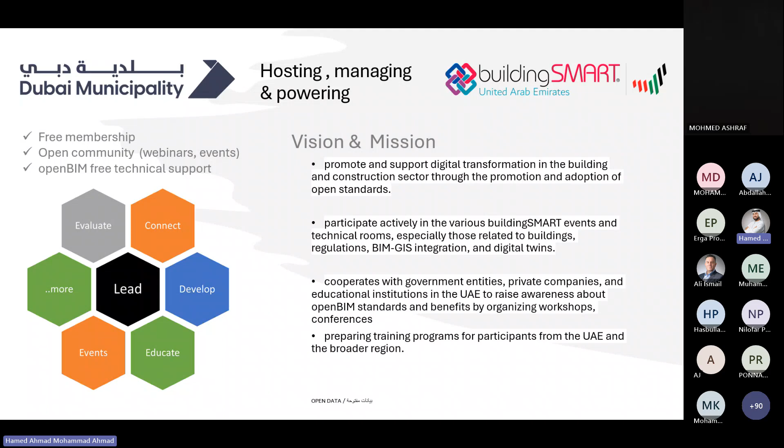So, our mission is to unlock productivity and sustainability by championing open data and promoting open standards in the building sector. We aim to position the UAE as the global leader in digital transformation by integrating innovative technologies and fostering partnerships. The buildingSMART UAE chapter is proud to host and manage initiatives that foster collaboration among government entities, private organizations, educational institutions, and even individuals.

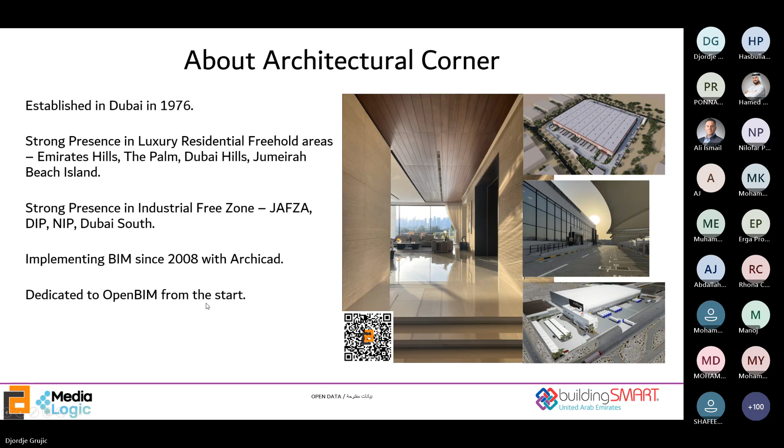What I wanted to speak to you about today is how we use openBIM in daily projects. We use BIM in all the projects that we do, regardless of the client's requirements or the lack of them. If the client has a BIM execution plan or specific requirements, we of course follow them without a problem.

Therefore, we have decided to show you two examples, case study 1 and case study 2. Case study 1 is our standard industrial project workflow and the way that we normally do it, with the emphasis on the openBIM collaboration with the steel supplier that is providing his model in IFC file format. We normally do everything else in-house in one federated integrated model because that is the best way to avoid clashes, and instead of doing clash detection after the models are built, we try and strive to do clash avoidance during the design stage.

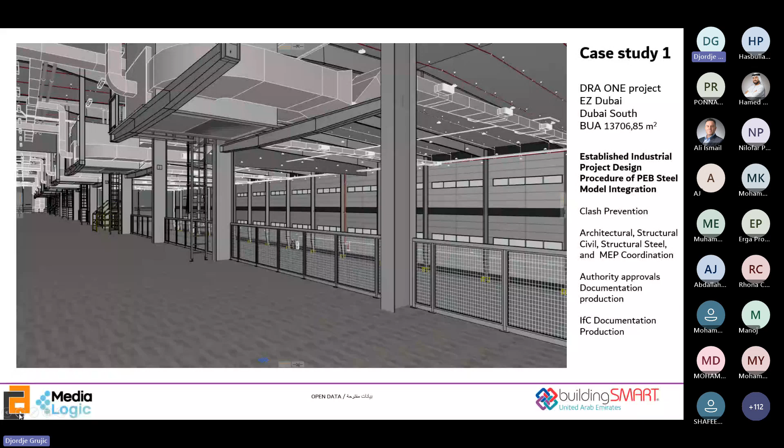If you have noticed, the steel design here is pretty straightforward. It is just describing the geometry, let's call it level of detail 200 or maybe a bit higher, let's say around 300. But when it comes to the issued for construction stage, the steel specialist comes in and they provide their IFC model that in this case was generated in Tekla. We then coordinate and integrate that model, but before we do that, we check their model and reduce the complexity of the model. Since in one of the cases for a larger project, only nuts and bolts were having around 8.5 million polygons, and the model was extremely heavy to manage.

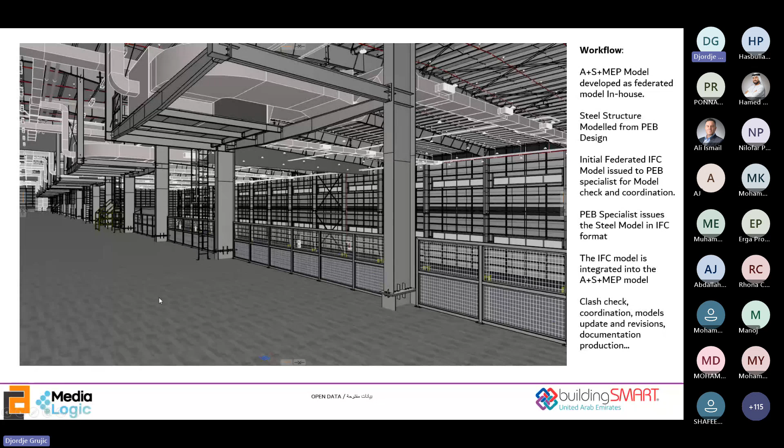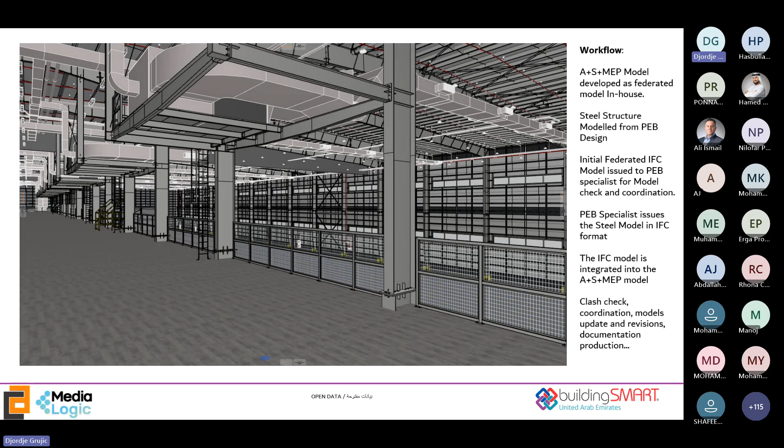As you are all aware, having a larger project, this one is not so big, can put an extreme strain on your computers and on your software. So at the issued for construction stage, after integrating the steel model from the supplier, we have done the MEP coordination. We have produced the issued for construction documentation for the site, and we have followed the site work by updating the models in order to, in the end, generate the as-built documentation.

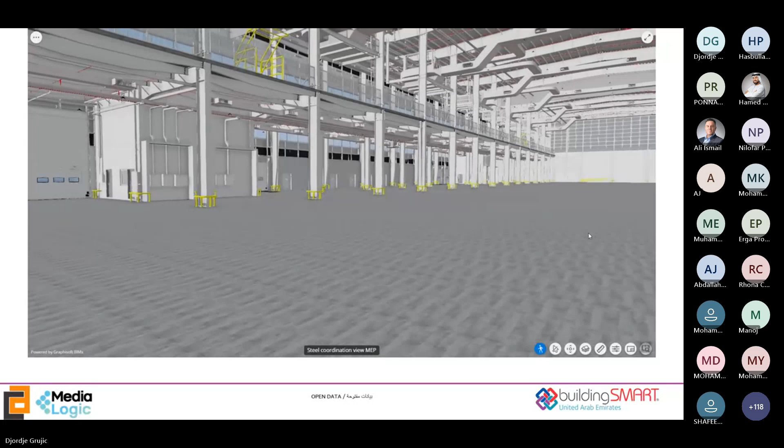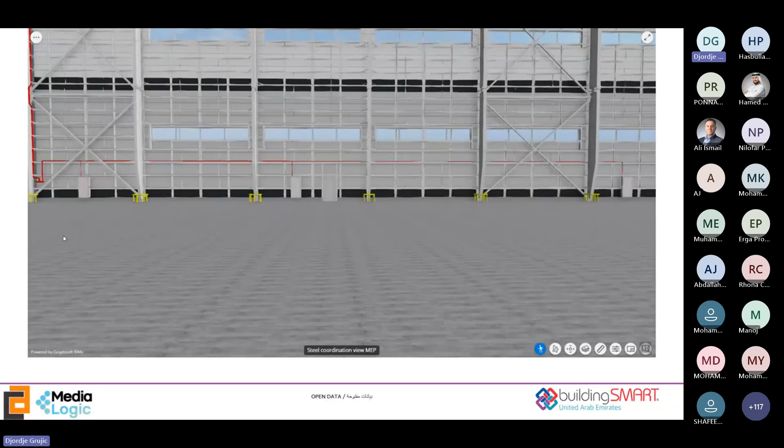This is a small movie of a walk around, if it works, a walk around through the model. As you can see, it is more or less. I have to say that the site team and the client appreciated having an opportunity to have BIMx hypermodels shared, and they have used them extensively for the design review by the client, and the site team used it extensively to clarify any small details or answer any questions that maybe were not covered in the standard documentation.

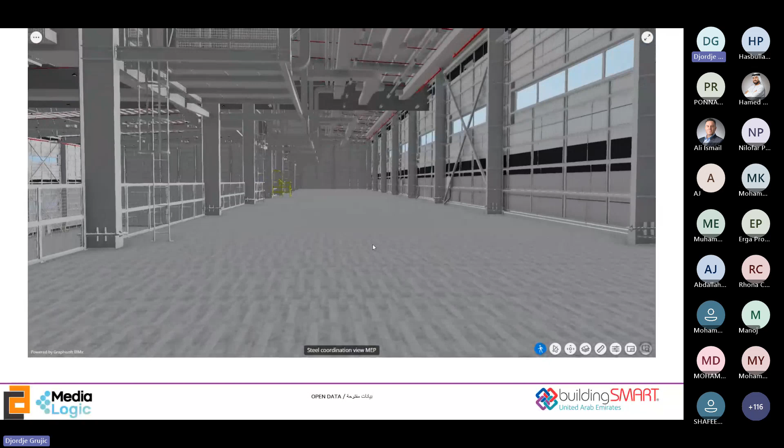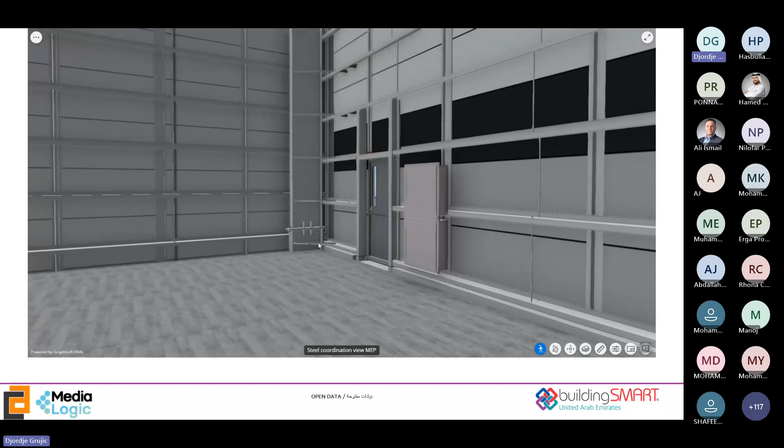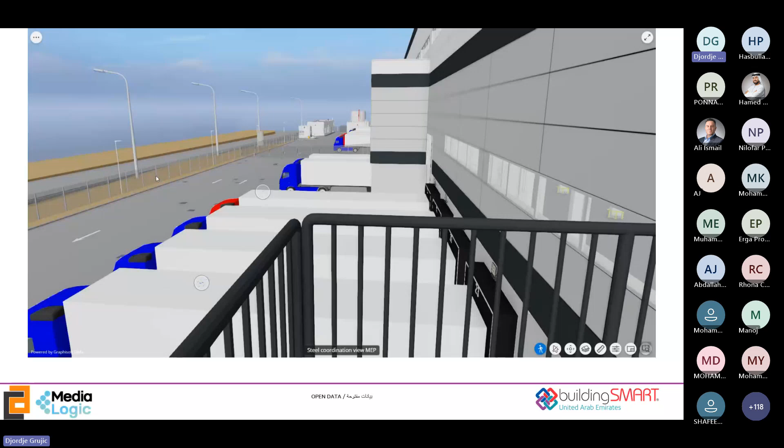So very quickly, instead of calling anybody from the design team, they just opened the model, checked it, made a snapshot on the usual WhatsApp group that of course exists for every project in Dubai that I'm aware of, or some other mode of communication that is more recordable and more professional maybe. And they were able to handle the clashes and the problems, if there were any, or answer any questions that they might have had on site, using just the BIM model and integrating BCF compliance and BCF questions and notifications that can be automatically sent and that show up in the model itself.

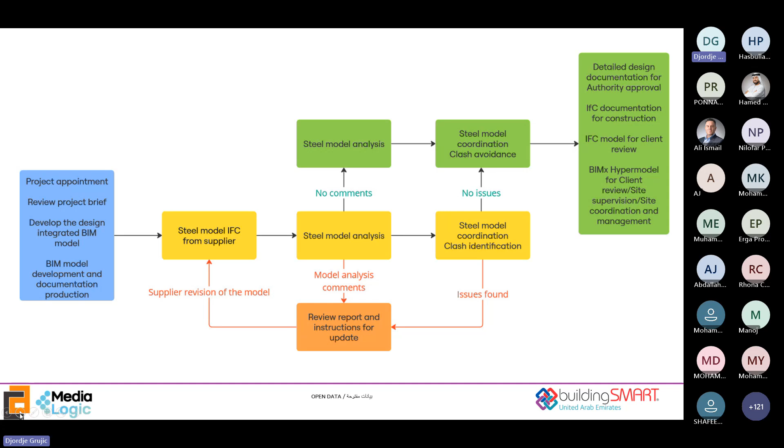And these are the lessons that we have learned. We have been doing this for quite some time, but on every project you learn something new because software changes, people change, design changes, clients' requirements change. A lot of things can change, and a lot of things can be different. For example, if you are in EZDubai in Dubai South, I have seen some colleagues in the audience that are very well acquainted with the area, you will see that all those buildings look more or less alike because there is a development control regulation specification from the client, but they are quite different. Maybe only the colors on the elevations and the application of them are similar. So every project has its own specifics, its own story. Maybe the scenario is rather similar, but the story is always different.

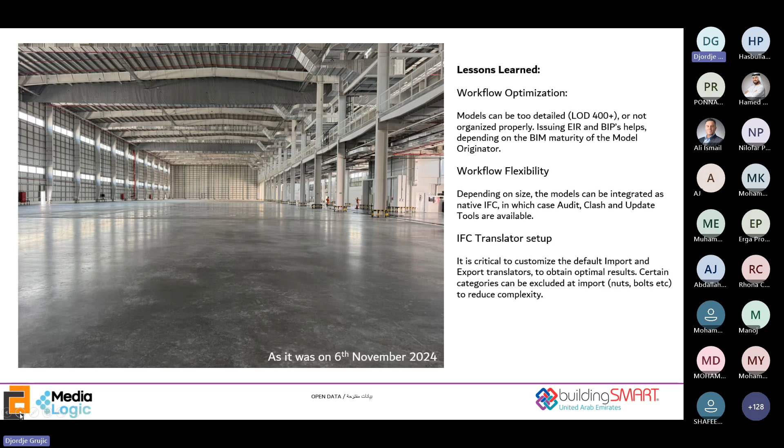Another project is slightly larger, about 3 times the previous, 40,000 square meters built-up area approximately. It is developed. It is now in approval process. It is developed by the Radius Group in DIP.

The story of this project is a bit different than the normal way that you normally work, because the client has very highly developed BIM capabilities and very specific requirements, with a very well set up common data environment and procedures for the running of the project.

So what happened is from the beginning, from the initial tendering stage, the client has provided concept design in IFC format that was the base for the development. What we had to do is to check those models and see how they work with the local regulations, with the specifics in the local requirements, with the authorities, and in short, to do a proof of concept and to use them as a reference for further development.

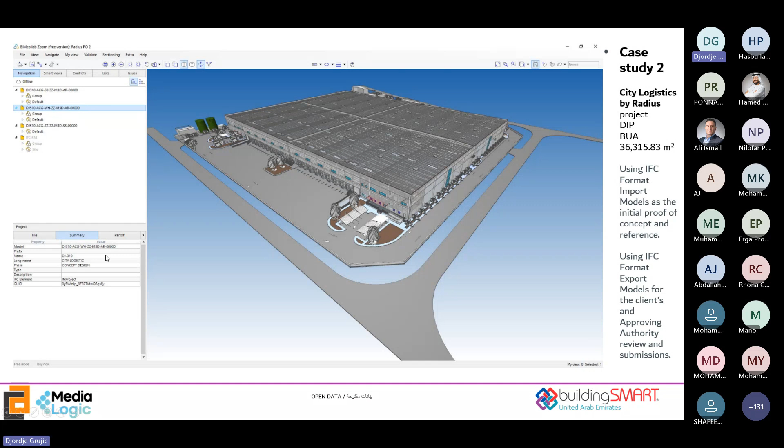After that, we have imported those IFC models and started reviewing and revising to the client's requirements, to the local regulation. There have been some changes in the structure systems. Some items were removed, some items were added. Normal design process. And we have been working on that project in the meantime.

The developed model, of course, we had to rebuild practically from scratch, using the original models as the reference. Parts of the original models are still living with us, although converted for the ease of use.

But again, the openBIM procedure, using exchange formats that are easily readable by multiple softwares, is the base of the success of transferring the client's idea and following the client's requirements to produce a design that the client is happy with, and produce a model or multiple models, whatever is required for the generation of the documents for the approvals and for the Dubai Municipality BIM submission approval also.

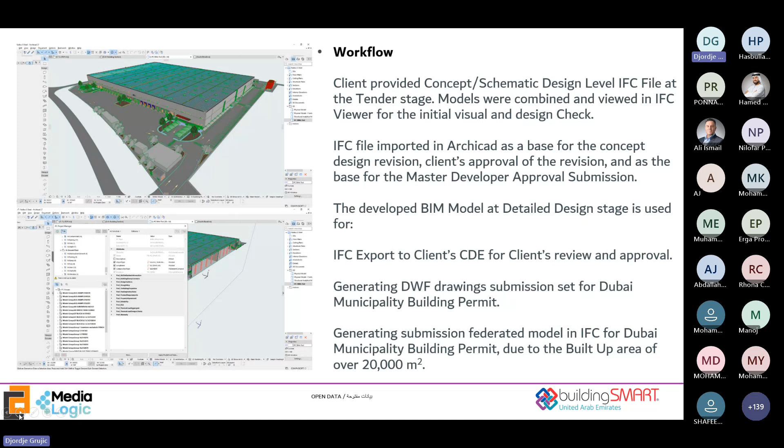If you notice here on the left on the top, there are 3 models, the 3 original IFC models, and we have combined our IFC model from ArchiCAD, from our updated concepts, preliminary design, so that we could run checks whether the models are aligning, whether all the required parameters and all the required elements exist in the models, and in short, whether everything is okay or not.

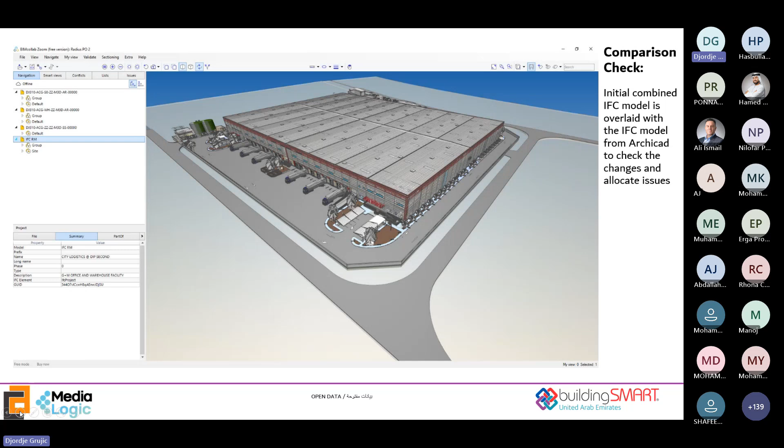In this, we had extensive support from the client, because they are used to certain software packages that they were normally using, but we have managed to overcome all the software compatibility, or the lack thereof, issues, and we are proceeding successfully.

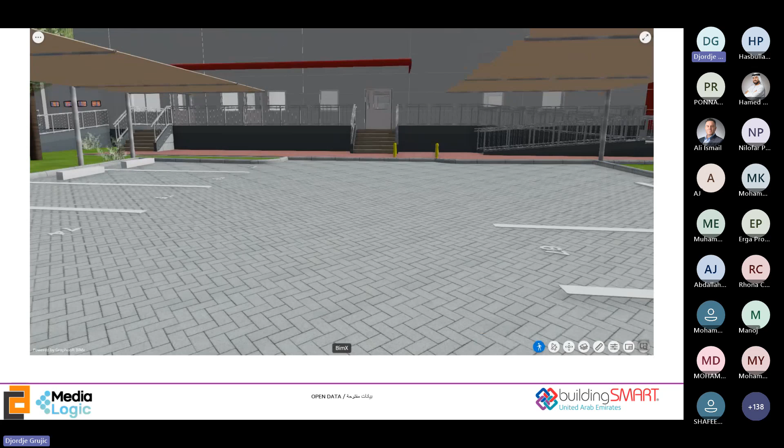Just a small movie to illustrate the model as it was about a month ago, if I'm not wrong. Of course, some things have been sorted out. For example, those bollards were in the wrong place. That's a minor detail.

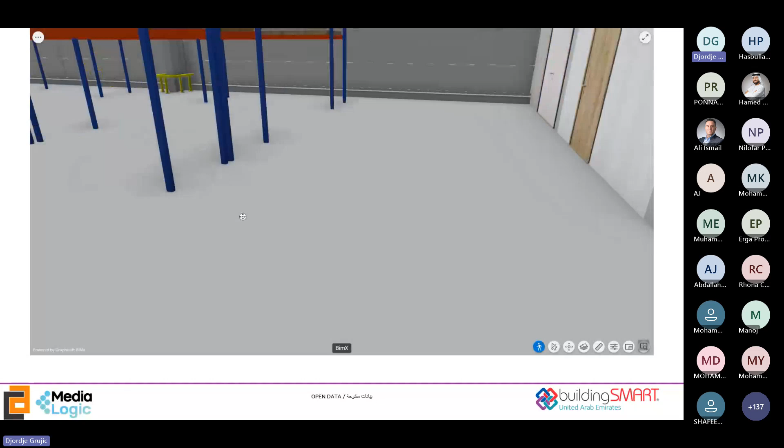What is the point of this exercise, or what did we want to show you here? The idea that you can start from one thing and develop it to be the other thing. Start from the IFC that was generated from Revit, or start from the Revit model, coordinate it with ArchiCAD, import it, review it, compare it, run the clash detection, run the specification checks, run the quantity checks.

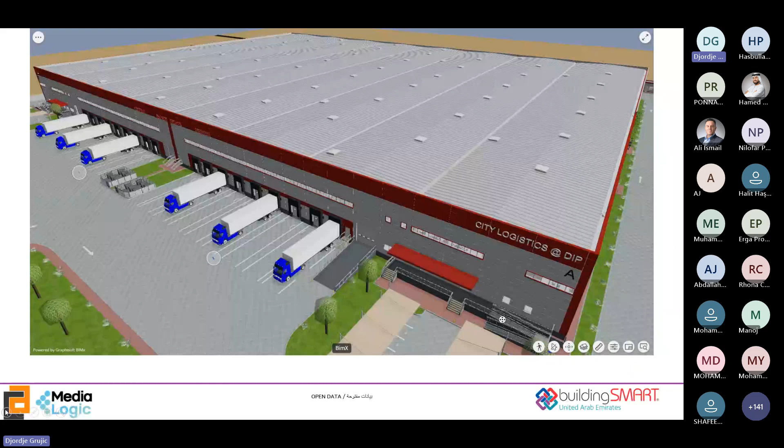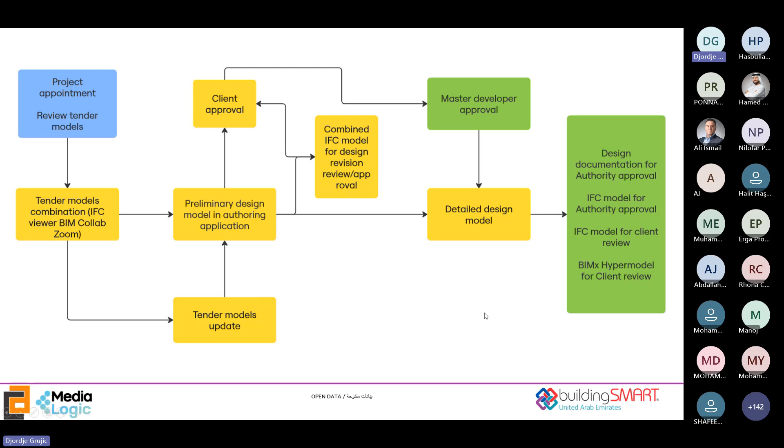It is all possible when you work on the openBIM principle, when you are not locked into a certain way of working, where everybody can use what he likes best. This is the approximate workflow that was applied in this project, and we are in fact still developing it further, refining individual steps, individual approaches, and of course individual procedures, to better suit the client's requirements and to optimize the workflow.

What are the lessons learned? If you are familiar with how ArchiCAD handles IFC files, there is an XML file that you can edit or write yourself if you are inclined to do so. That is called the IFC translator, which tells ArchiCAD how to read an IFC model or how to write an IFC model, and that setup is absolutely critical to customize the end result.

As we all know, computers are notorious for never doing what we want, but always doing what we tell them to do. So if we don't tell them to do the right thing, then I don't know how they are going to do what we want them to do.

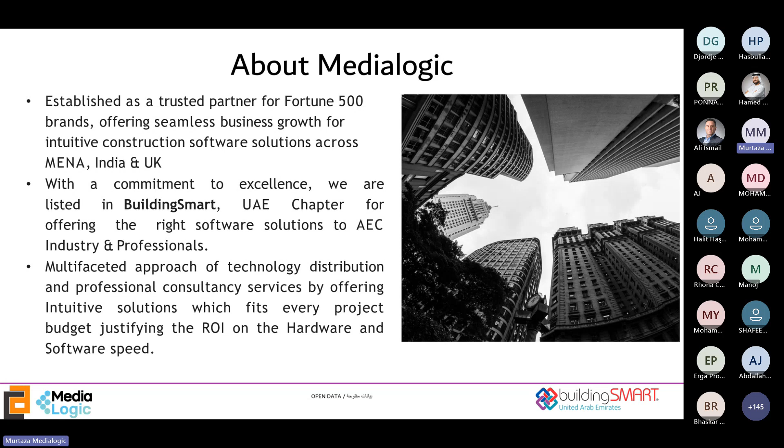Yeah, hi. So already most of the work is done. So let me introduce myself. I am an architect by profession and a certified BIM manager. I am an application specialist here at MediaLogic, and mostly I cater to the open BIM as well as the BIM sector out here. This is something which we all know about, but still we miss out where and what lies in between. So, taking very little of your time, I would just like to talk about closed BIM and open BIM and their implications for collaboration in the AEC industry when a construction project comes into picture.

These play a very important role when you have to manage your BIM models, like Djordje has already showed us how this information plays an important role. So talking about closed BIM, majorly throughout the globe, we see that today everyone is participating in closed BIM workflows. Only we find a very small fraction who is working on open BIM, and buildingSMART UAE and Dubai Municipality are playing a major role in driving everyone to open BIM standards and making it easy for us to understand why open BIM is needed.

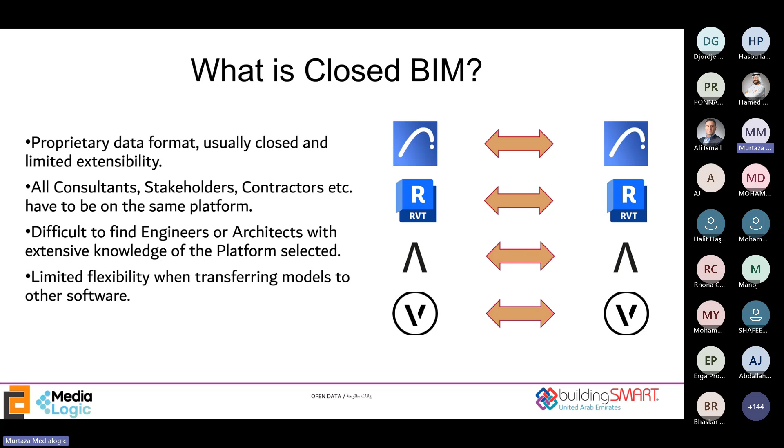Now, closed BIM involves working with a single software or a vendor, where you are forcing everyone to be in your own environment and not letting them use what they want. And maybe this can streamline your processes, but what happens is when any outsider comes in, they find it difficult to adjust to that. So that's where OpenBIM comes into picture, that it's a collaborative approach where you can use what you want but still can talk to each other. Like Djordje has already given an example.

Future proofing ensures that data remains accessible to everyone even after X number of years. Even if the company, the vendor, or no one is present, you still have your data with you, which you can use. Collaborative approach: OpenBIM bridges the gap between disciplines, fostering better communication and integration. And again, the point of efficiency—it reduces errors and rework as everything is standardized throughout the process.

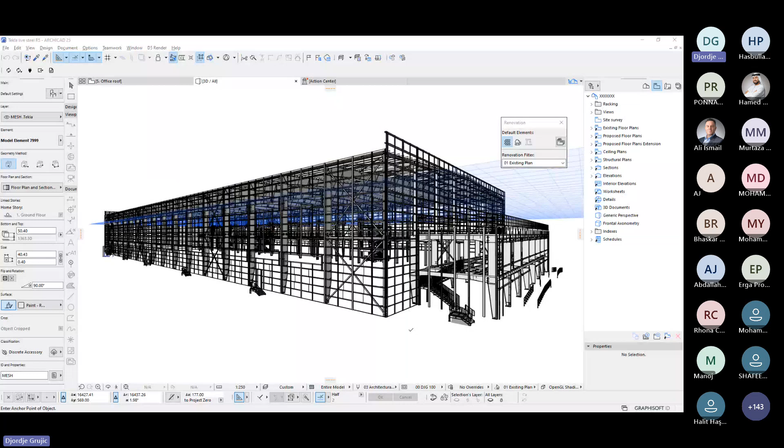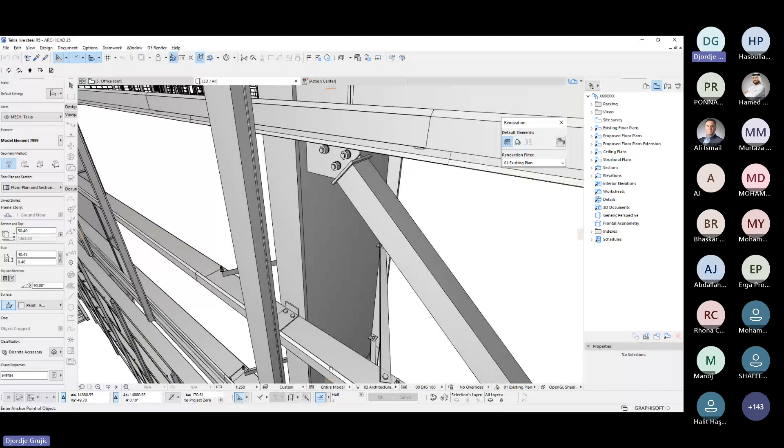As I mentioned before, let me share the screen quickly. So this is the steel model that came in as an IFC file for that first small project you've seen. If you look, it's very well made—in BIM speak, this is approximately LOD 400, if I'm not wrong, correct me if I'm wrong. But frankly, for design coordination, even for documentation, you don't need this. You don't need the bolts, you don't need the nuts below the bolts, you don't need this bolt either. Yes, you need this element because it can clash with the MEP element or whatever.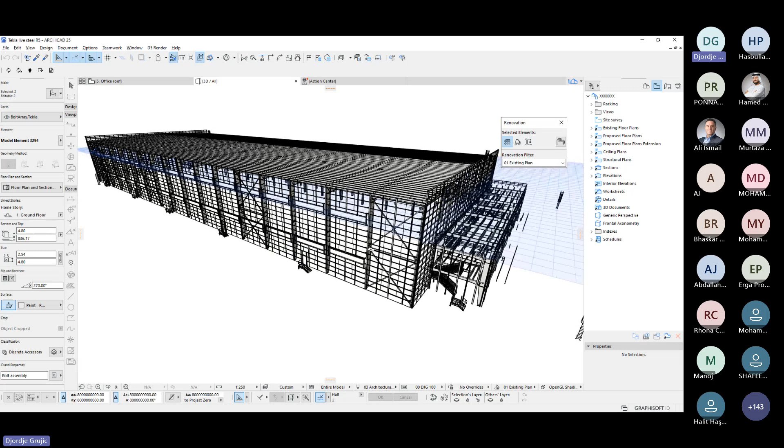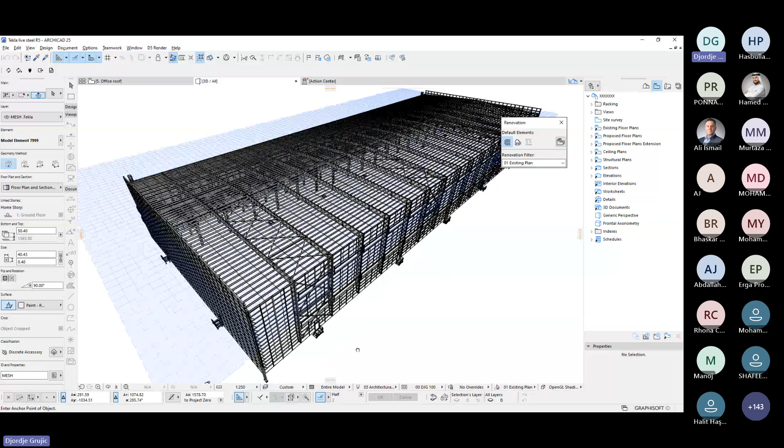So what we normally do is discuss it with the supplier of the model, with the producer of the model. There are some flying objects also, if you notice. We review the model and adjust it before we merge it, before we integrate it with our model, because we're doing two things: we're saving time for ourselves, we're saving time for the client, and as the second question Bhaskar asked, we're saving time for the project.

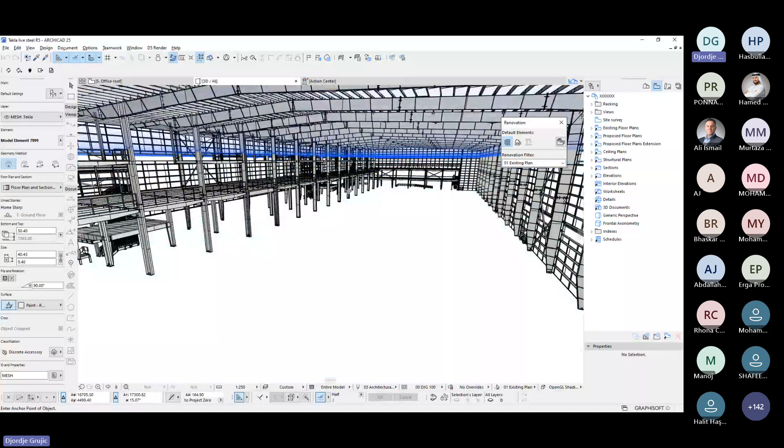In this case, as in all other cases, these projects usually run behind—last week we were three weeks late. That's the usual deadline. So using the technology, using all the tools at your fingertips, helps make the project more efficient and definitely faster.

Muhammad Taha asked: what are the challenges about transferring attribute asset data associated with native models? Is IFC compatible to transfer this data without any loss? The shoe actually should be on the other foot—is the software capable of transferring the information it inherently has into the IFC file? Because IFC as a schema, as a model data structure, is capable of holding all the data that exists. Is the software you're using when exporting IFC capable of transferring the data without any loss? Of course, as in any translation, something has to be lost.

Let's hope it's not something critical. It's like in Dubai, everybody speaks some kind of English, because otherwise we wouldn't be able to understand each other. Rarely, when people from the same country or region meet, they can speak in a language they all understand—maybe their native language. But that goes for so-called closed BIM. We're trying to be a bit more open and flexible, and trying to speak to everybody.

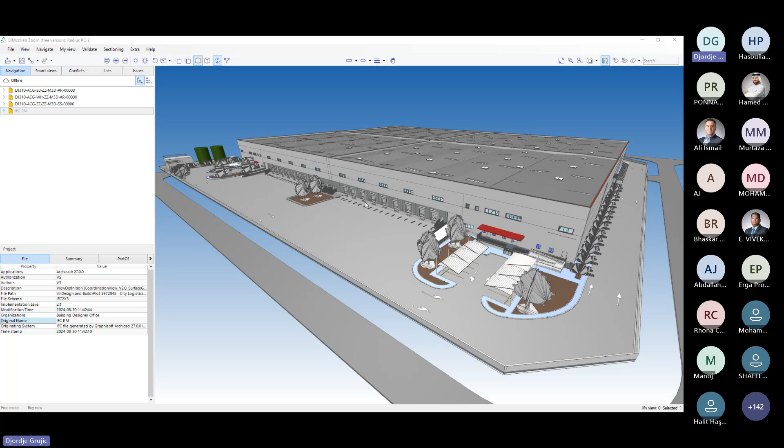So let's open another file—I'm just using live files to show you things. This is a small project of 40,000 square meters. These are the original models from the client that came from Revit. As you can see, all the materials and most of the parameters are there.

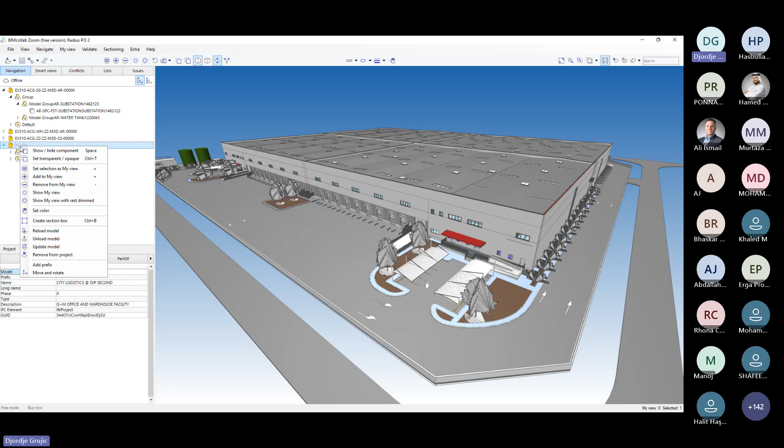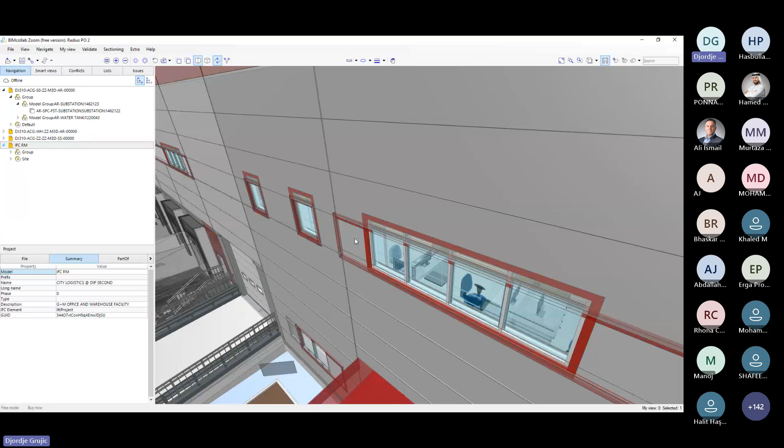This is our model on top—we have changed one window, for example. It's not like this, it's like this—just sprucing up the elevation, fitting the window size into the panel size. Nothing major, nothing very complicated as a change, but important to show.

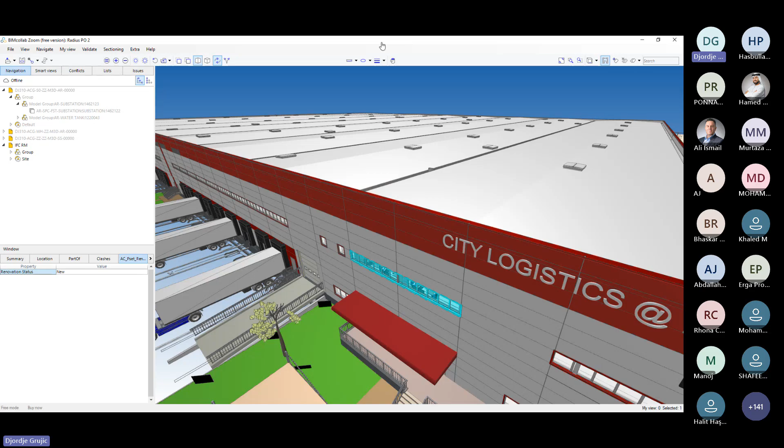And again, if you click on this window, this is an IFC file coming from ArchiCAD. You can see what it is, its location, what it is part of—all the basic parameters are there. As I said, let me stop sharing again and share another window.

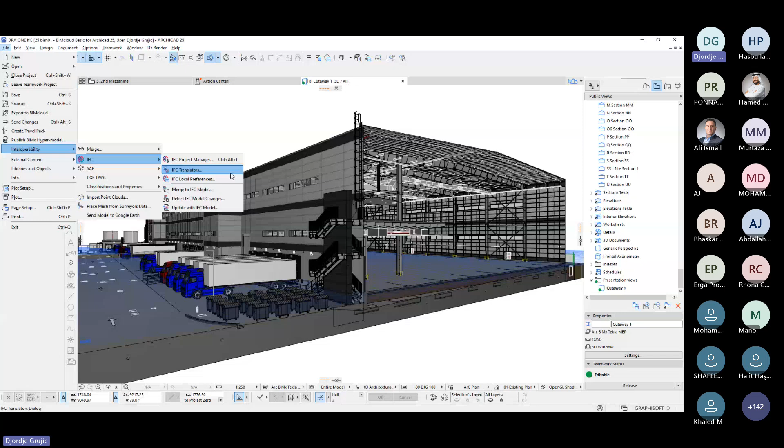Okay, this is a project from a year or two ago, so the ArchiCAD version is 25. If I want to set up something, I can go to the IFC translator. For example, Dubai municipality is providing an IFC translator for the preparation of their submission models. So out of the box, I have those translators.

AECOsim is, for example, Bentley software, Allplan you have heard about, CostX you have heard about. Dubai building permit IFC 2x3 or IFC 4, and Revit export for reference, Revit MEP, Revit structural. Scia you haven't heard about, it's maybe a structural software used in Europe.

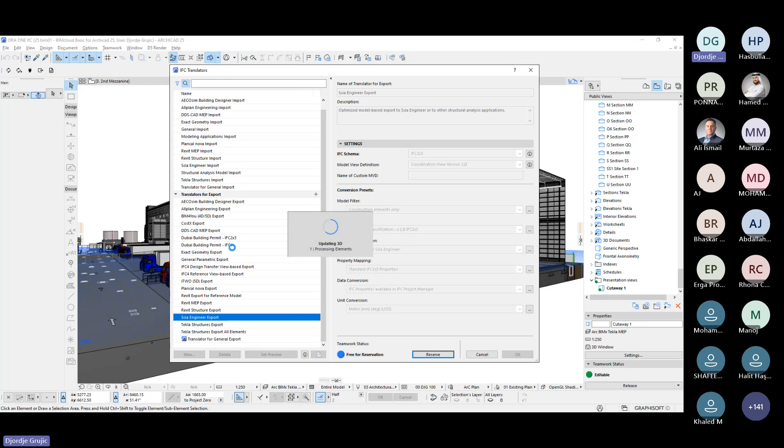So for every case, this is a teamwork project, so I have to reserve this in order to show you how to set it up. In every case, if you work with somebody else, there is at least a basic translator provided out of the box that you can then tweak to the actual requirements.

As you can see, speaking of classification, normally a lot of classification here is Uniclass, but on the other side you also have the BIM submissions classification for the Dubai municipality. For example, I want to send it to an MEP engineer that is using Revit, so I can choose my IFC format.

I can choose what I want to send, what is the model view definition as per the IFC settings, what part of the model I want to export, because really the MEP guys are not interested in everything. Which classification can I use? Do I need to add more classification? What is the geometry conversion?

This is very important. Yes, BIM is not 3D modeling, definitely. All the 3D models are used for visual representation, but you have to take care of the modeling and the number of polygons, unless you want to kill your computers. I mean, ArchiCAD can take a lot. We have integrated models ranging from 2 to 3 gigabytes that we can work on. Of course, slowly, but we can work on it. It's not crashing.

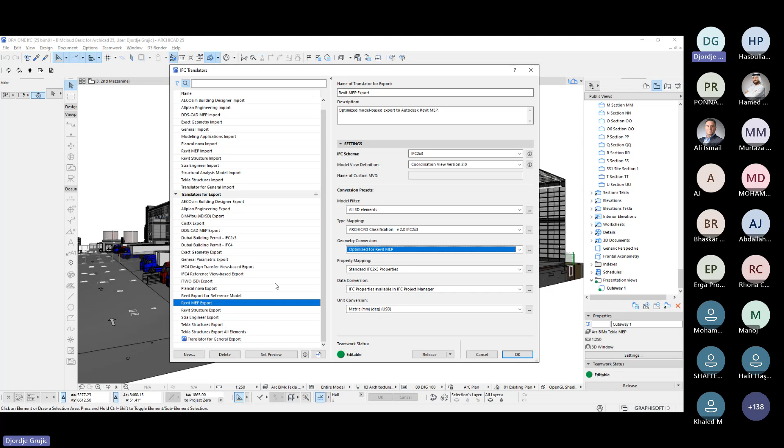So let's go back to the topic. This is, in this case, how we can ensure that the information is transferred properly. Do we have any more questions? I don't see any more questions.

Actually, we have a few questions, Djordje. Please, I'm also helping you by answering some of them. The first question was about, is the project delivered on time and budget? Yes. And how openBIM helped in achieving this goal? Another question was about the challenges regarding transferring attribute asset data. I think you talked about it.

And there are some questions about how IFC is different from Navisworks, since most clash detection software like Navisworks and Revit can use both formats. I did some reply on it. And there are some questions about how do we handle software compatibility issues when using openBIM tools, for example Autodesk Construction Cloud, Revit, ArchiCAD, with IFC or other standards. So there are a few questions.

I don't know if you can check the questions and answers yourself. You should. I did not see those, or I cannot see them. But okay, anyway, now you see them. Okay, now I can see them. Yeah, good. You know how they say everything works better if you switch it on, right?